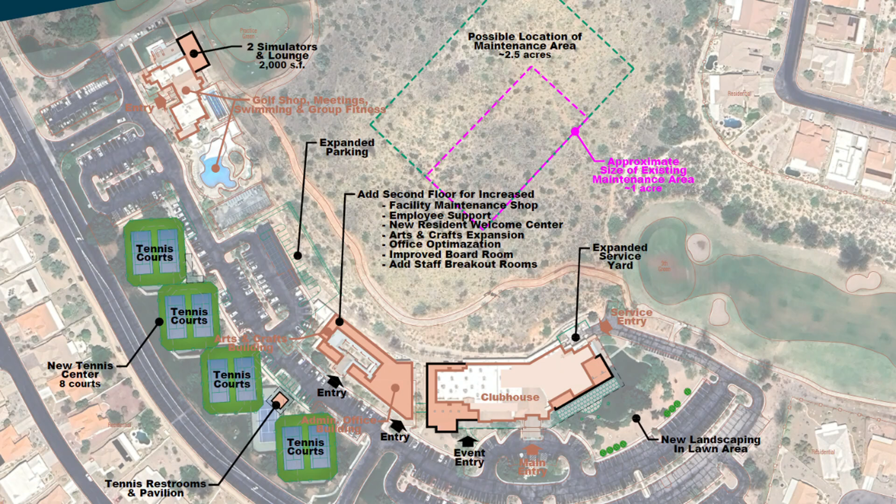You might get into it and say we need this more shaped to the hillside, more of a curve, but at this point we're not getting into that level of planning. We're looking at where we have space around our campus and community to house this kind of facility to serve our maintenance needs.

This would give us the ability to house a complete maintenance facility on this site, serving Mountain View and CAM for the entire community as a central maintenance center.

After looking at that, you'd ask: what will we do with those other maintenance sites we already have? Those could either become satellite facilities or we'd find other uses, and that might affect how big you'd ultimately make this. All of that is still to be determined—we're not ready to decide any of that yet, but this gives us a visual idea of what it could look like.

Let's look at the next slide. On this slide you can see the exact same thing I showed you before, but flattened out more into a plan—we've eliminated the aerial photo and given it a more graphic plan.

Here we're showing some expanded parking into the hillside, because we're taking some parking for the tennis center, and we're rebuilding all of the tennis shelters, platforms, and tennis pavilions—a whole tennis center.

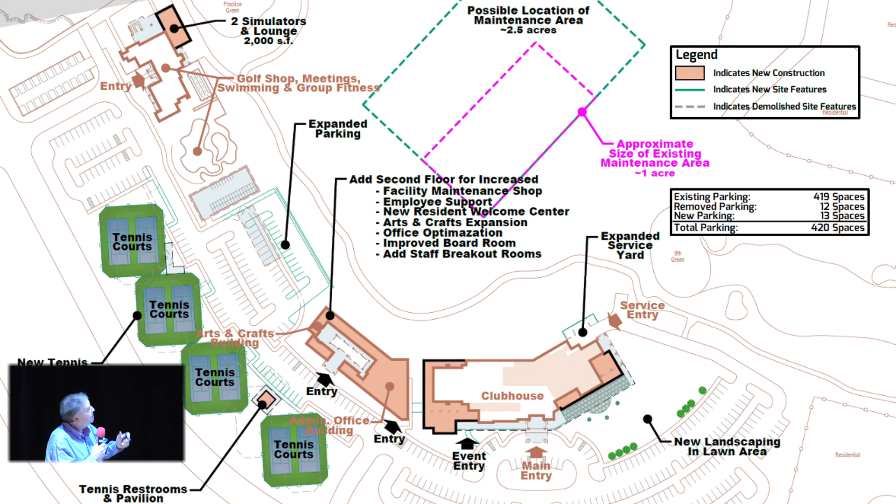Let's go to the next slide. This is a blow-up of the golf building, and as part of that building—we talked about this last time—it doesn't have a lot of traction, but I think it has a place in the plan: some simulators and a lounge as part of the existing building.

The simulators would be under the existing porch roof you have today, so it doesn't anticipate any additional roof on the site to speak of—it just fits under the existing roof and becomes additional enclosed footprint within the building.

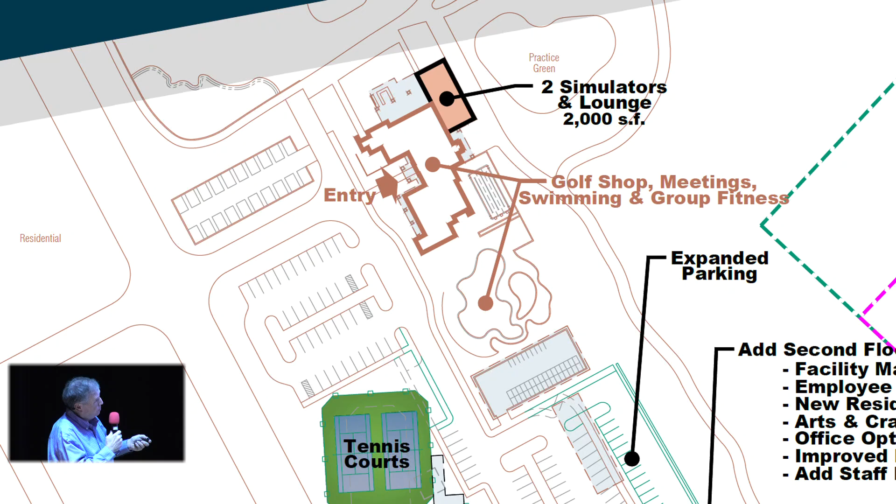Let's go to the next slide. On this one we show the new tennis center, which would include a tennis building and reallocation of parking—you can see the green.

The lines here show new sidewalks and new parking. The dashed lines show where existing facilities are, so you might have a curb there, or an existing tennis court sitting in this area. Basically, we've reallocated all the space where the tennis courts are today to get 4 sets of 2 courts, for a total of 8 courts.

And so you get a whole new tennis center out of the deal. The other thing we're doing here, and I know there was a lot of input back on this, we don't want to have a 2-story facility at the club.

At the same time, I wanted to challenge you back on that a little and say, if you don't have a 2-story space, we're either going to have to find more space around the facility, like up on the hillside for more maintenance facilities, or we're going to have to take parking or something else to get to our goal of basically doubling the size of the arts and crafts expansion and office optimization.

Ultimately, we need a map location for how we would double the size of our existing arts and crafts and admin structure. Dan and I have been talking about this offline, and he points out that potentially some of the clubhouse maintenance or internal building maintenance, which takes up about 2,000 square feet or less in this building, could potentially move into a community maintenance facility if it was close enough.

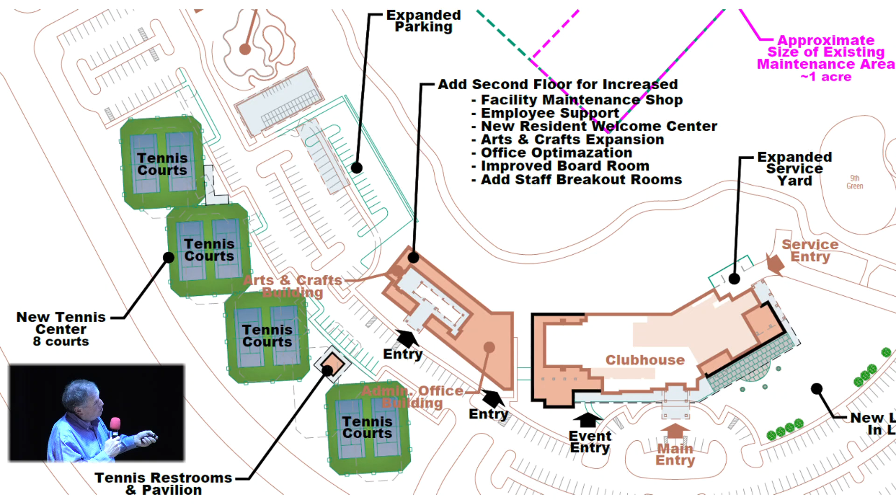My takeaway, and why I'm sort of challenging you back on it, is you can easily see that doubling the size of that is going to take that parking lot. I didn't want to give up that number of spaces necessarily, or we're going to have to do some sort of structured solution into the hillside, which is an opportunity or an option we could do, but you're still going to probably end up going up. Otherwise you're going to be buried in the hill with those facilities.

So here, at least, we could say you could imagine and envision that all of the community and homeowner functions would be on the ground level, and just let the offices go to the upper level and be in an office complex that would sort of wrap around. The exact design and detail of that could change. You could say, okay, we'll have less courtyard and more of something else—all of that is up for grabs in a more detailed design as you get into it.

Our real goal here is this: either we need to adjust our program and say we don't need more arts and crafts room and we don't need more offices and all of these kinds of things, or if we agree with our earlier suggestion that we need to about double the size of that, we either have to find more space on the ground for it, or we can go ahead with a two-story solution like we're showing here.

It makes me think this makes more sense visually on the site. It doesn't have to be huge, and it makes more sense from a centralization standpoint on the site. If it doesn't work out, then we'll bring options back to the committee. As we look at it, whatever you want us to do, we'll take it back and work on it. Let's go to the next slide.

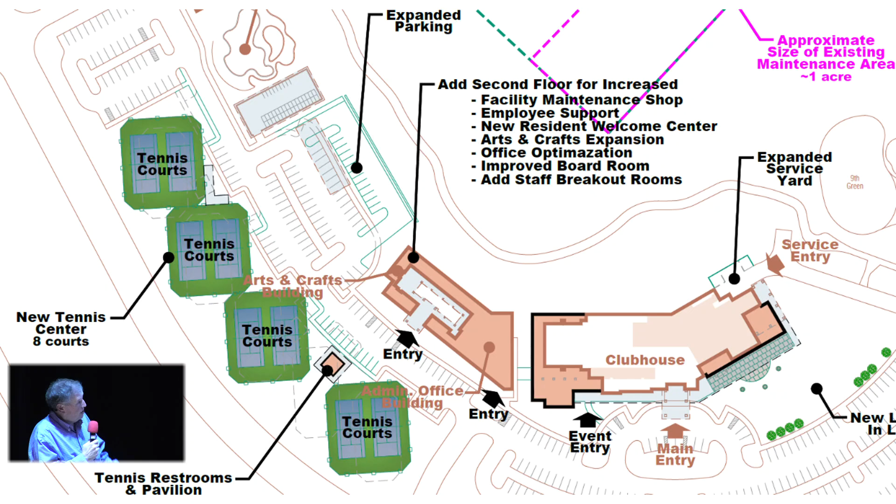We're going to go into the clubhouse here a little bit. On this clubhouse plan, can we move this guy up there in that corner maybe, Booth? So we can, thank you. Obviously this is our arts and crafts building over here on the left-hand side, and then we're having our main entry and our new event entry coming in here.

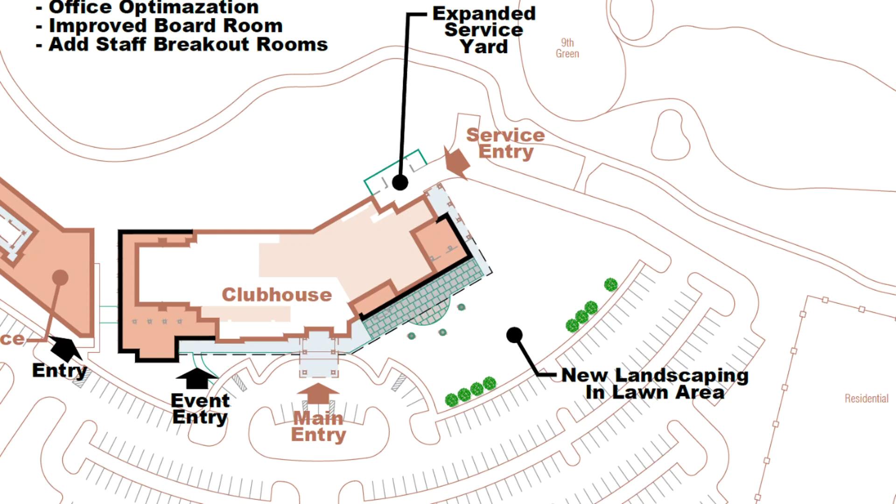I think changes to this plan since you've seen it last time at this site plan scale—we adjusted this area. There was some question whether this covered area and outdoor area was big enough. So we've shown a little more covered area, a similar amount of covered area, some more outside uncovered area, and some fire pits out on the lawn, which is a nice feature you could do. Again, it's sort of graphic at this point.

It's not really, it's meant to tell us that we're doing something there. It'll ultimately get more design.

The other thing I think we did is we're showing a little bit more connectivity, and I'll show you an interior diagram of this, which you can pick up on what we're doing a little bit better.

And the last piece, two other pieces. One is we're showing an expanded service yard, which we didn't really show last time, but we think we should have more room in here to service that space, to service our kitchen and everything, so it's an expansion of the service yard.

And the last piece was, as we were thinking about how this entry would work and how you might come to this front door and get dropped off, you might want to just walk on a covered walkway down to that entry rather than have to either walk on sidewalks around or walk into the building and walk down the hallway. It gives you just a secondary option.

And I think it could give us the opportunity as we start to change this building with new additions and the kind of work that we're talking about, we might want to really change the facade or adjust the facade if we feel like it's necessary, because you could do these new arcade covered walkways that walk all the way around for the outdoor. You could walk in, for example, at this main porte cochere and turn right and come right into an outdoor dining area rather than coming into the house and coming back out of the house, and just sort of gets it all connected.

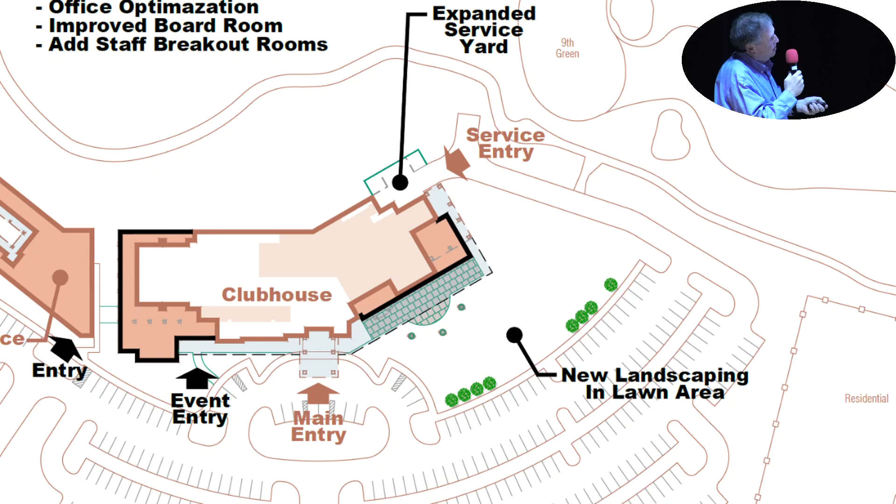There's opportunity for design there and design work that can create a much more unified appearance along the entire facade of the clubhouse. Give us something to work with as we start changing elements around the facade. I think that's all, it's sort of in a master plan. It signals an intention of better connectivity on the outside as well as on the inside.

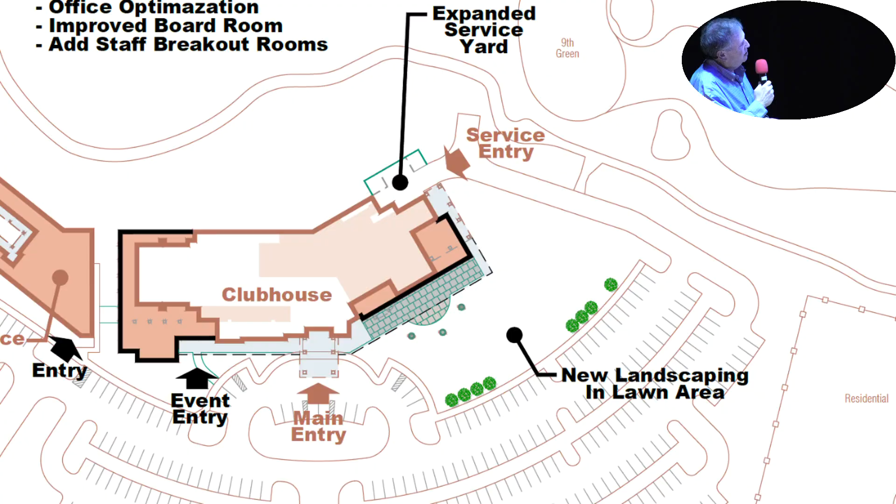So there was some question that sort of came up about, are we big enough, are our restrooms big enough, and those kinds of things. And what we're showing you here now is, largely what we're adjusting is not internal seating counts.

Some increase in the member restrooms, especially on the a la carte side, about 80 square feet more for the restrooms. And then the Sonoran room, which is sort of a private dining room we talked about last time, there was some thought that maybe it could be a little bit bigger. So in the last one we had that about 1,100 or 1,200 square feet, now we're showing about 1,500.

And then we get a new entry foyer, which is our entry into our ballroom space, and some more furniture storage back of house space, which is really inadequate, same thing with kitchen. The biggest adds here are the things that let us service the club better, service our members, our users, our guests better. So better furniture storage, better kitchen space, all of the back of house stuff to let us really operate it, all serving a similar number of seats and places within the facility.

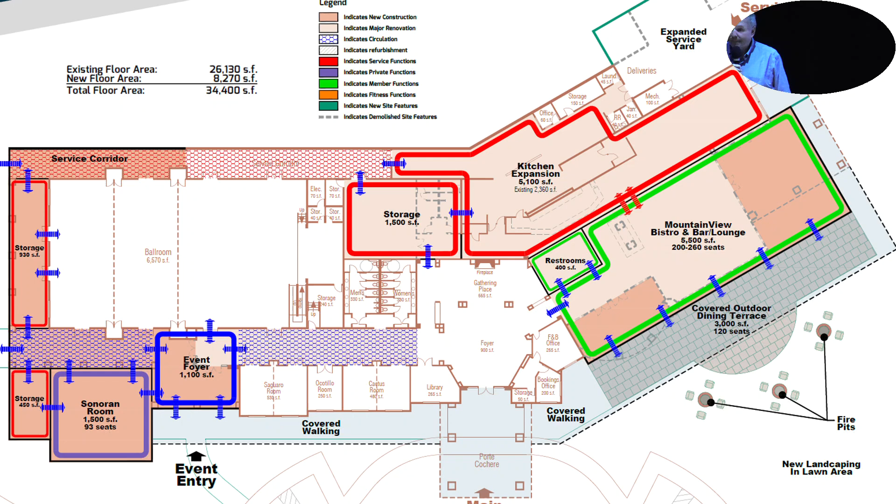Well, anything can be done in phases, and then that gets into the whole discussion of what's a phase and what's an effective and appropriate phase, right? So you could look at this and say this whole right-hand side of the plan could be a phase you could do, and you wouldn't do anything on the left-hand side. But at some point you'd get to where you'd say, well, I just want to do the kitchen - but you probably aren't going to be able to just do the kitchen as a phase because it affects too many other things in a domino way.

You want the phase to be big enough that you're not spending a lot of extra money in mobilization costs. If you do 10 different little phases, you're going to spend twice as much money as you would if you just put them all together, because of all the mobilization costs of starting and stopping. So, everything we're showing you could be done in phases. It's another group's responsibility eventually to figure out what those phases are going to be.

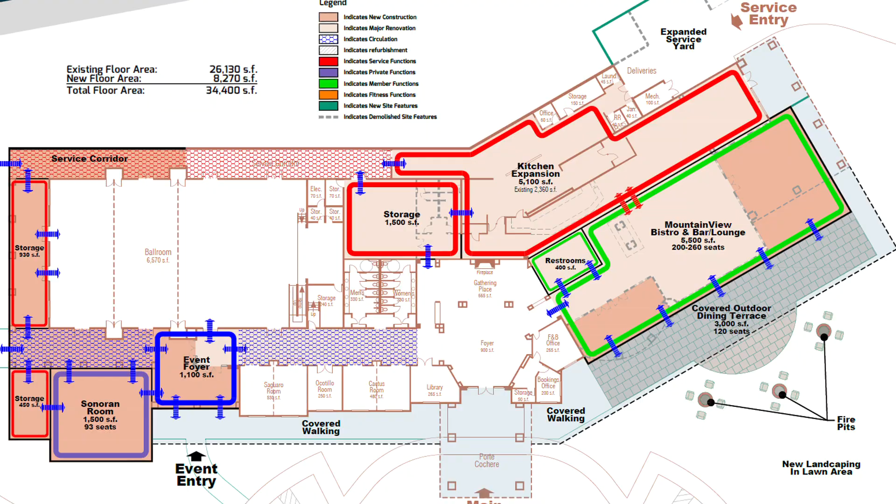If you go back to the existing surface area - sorry, back one slide. Go back one slide. One more? Two, one more, yeah. So our new cornhole is going to be in that space where you put lawn games, and then we have this empty space right now.

Just looking at the footprint as it exists, talking to a lot of people, when you talked about having a gathering place for the theater, that empty space could be a gathering space for all of this. It can be attached to the patio for the pool, but it can be a juice bar, a coffee bar, a theater - where the tree is, the empty space right there. This space here. Yes, that area.

In talking to people, if they're out walking, playing tennis, at cornhole, at the pool, at the gym, a gathering place in that spot without having to do a mega thing is something that people have talked about wanting. Whether it's a coffee bar, a juice bar, later on, maybe it even has some game entertainment or something with it.

But why aren't we just thinking about using that space instead of just taking things apart in mega style that we can't afford? Well, I wasn't so concerned about affordability yet, because affordability is all down to phases and what you want to do and when you want to do it. But I think it's easy to think about.

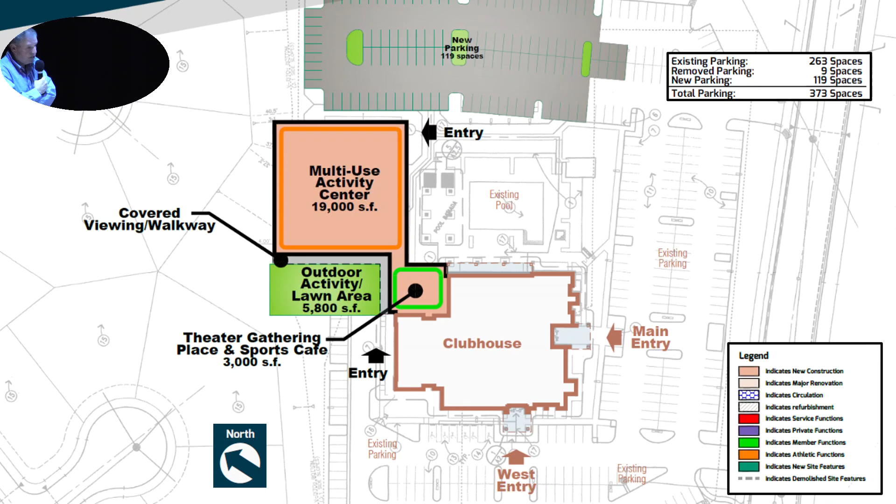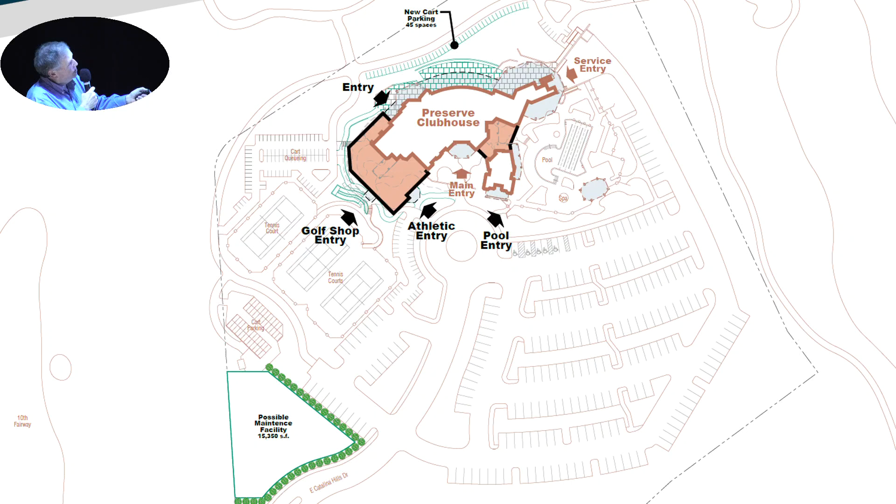As we come around this facility, we have a walk coming up to the top, and we'll have a secondary entry here, so after golf you might come up this way and enter this way as well. So that covers the additions and things we're thinking about on this.

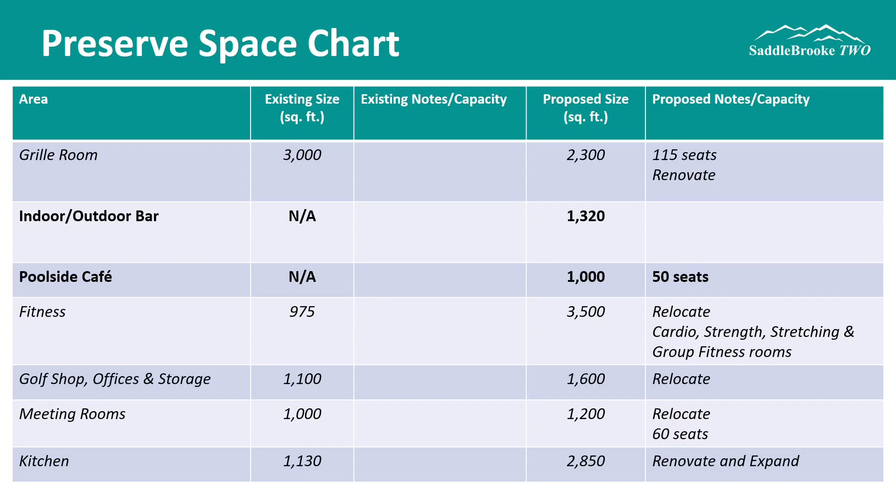The indoor-outdoor bar becomes a new space within this plan. The poolside cafe doesn't exist at all today, and we're going to create a new poolside cafe at this operation, again providing those central gathering spaces around activities at our various facilities. Our fitness space is about 900 or 1,000 square feet today, and we're going to about 3,500 square feet.

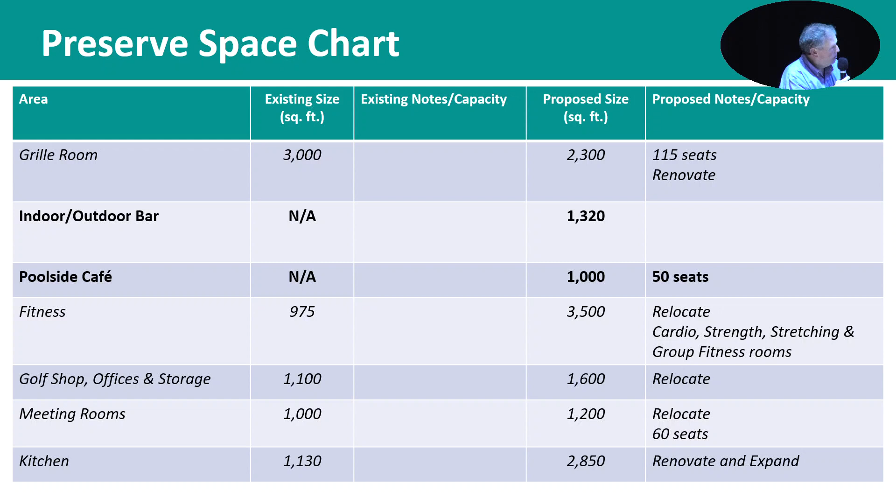The golf shop and storage is a little undersized today, and we're showing a bit more room, mainly for back of house within that golf shop—I don't think the sales floor needs to be a lot bigger. The meeting rooms are largely about 200 square feet more. And in the kitchen, just as at our other facilities, it's significantly undersized, so we're more than doubling its size to serve all of this activity we're thinking we could create over here.

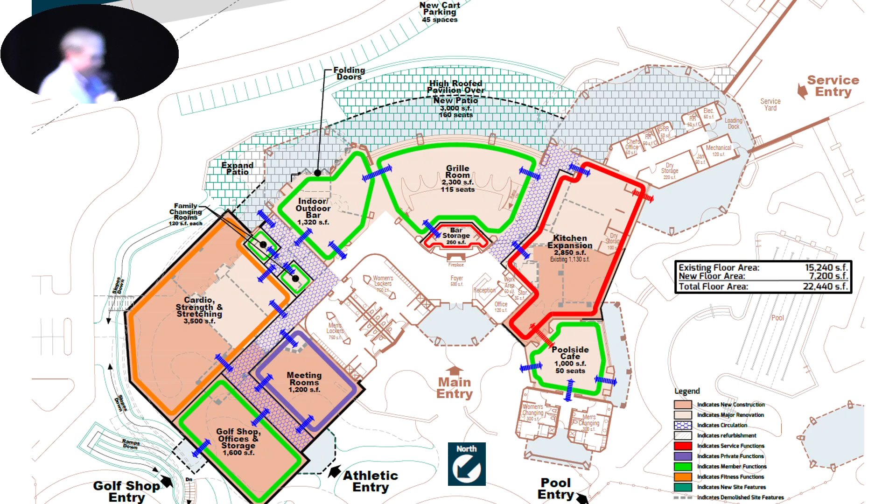Sure. So Kevin, you want to jump in on this too? I don't want to leave you out of the entire meeting, but I'll start though.

Where would I start? Well, that's actually a bit of a scientific process. So you show, some of it is right here in this group. We need to prioritize amongst ourselves. We have priorities that are given to us in the survey that we've already taken amongst the entire ownership. So we need to look at that survey. We need to soul search here amongst ourselves. And then based on that, we start looking at what's a higher priority and what's a lower priority.

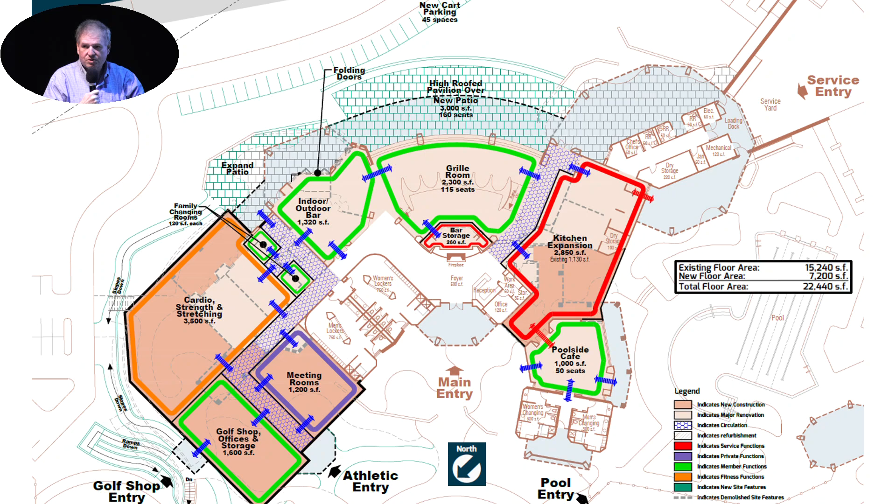Some of the other factors that go into that decision, in my mind, are extreme weaknesses, things that are extremely weak, like our maintenance facilities or our back-of-the-house facilities, which are very weak and underserve us and underserve our staff. And then I also think you would look at facilities you'd want to tie together, so you're always trying to find things that go together in such a way that they support themselves in the phase.

We have something we think we can get a lot of support for, some facility. I'm not sure what that would be. Maybe some sort of facility like the Mountain View Dining Facility. Updating that would be something we could get a lot of support for, having a much better dining facility and a kitchen that serves better. And then you try to tie that to some other need, so you're packaging two or three things together, something people really want with something that's like the sugar around the medicine pill. You've got to do this thing, so you give them something they want, and at the same time give them something that needs to happen. So there's always that political aspect of trying to think about how to put it all together.

How you do it is just like how do you eat an elephant? You do it one bite at a time. So communities like yours all over the country have to systematically approach making these improvements.

You find you're not the only community that's turned over and found out the developer somehow made it work just through spending a lot of money. And now you don't want to spend that much money to make it work anymore. You want it to be more efficient, and you want it to serve you better. And you're the owners now, so you have to think about it differently — the developer probably said that golf course equipment's not too important to me because I'll just lease it and turn it back in. He didn't have the same time horizon as you owners have when you own that golf maintenance facility and own that equipment. Now you have to think about taking care of it more because you want it to last longer so you don't have to pay so much for it.

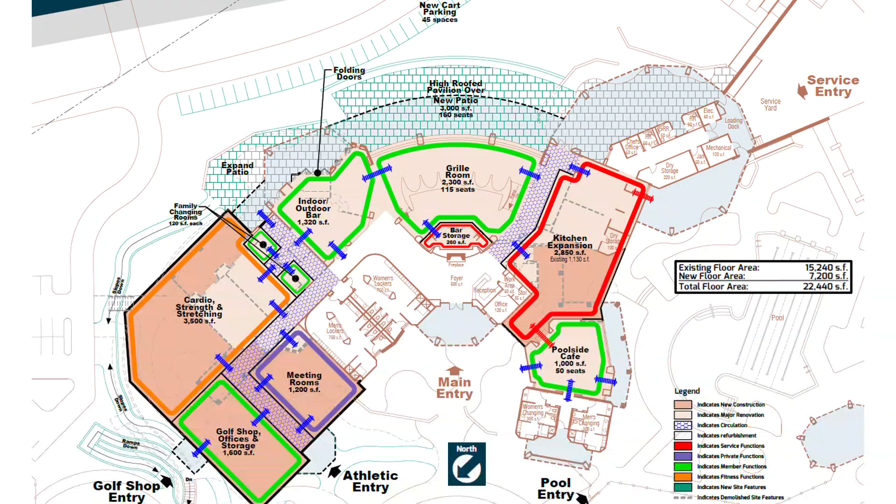Here we go. They're all great. Let's do the next slide or two.

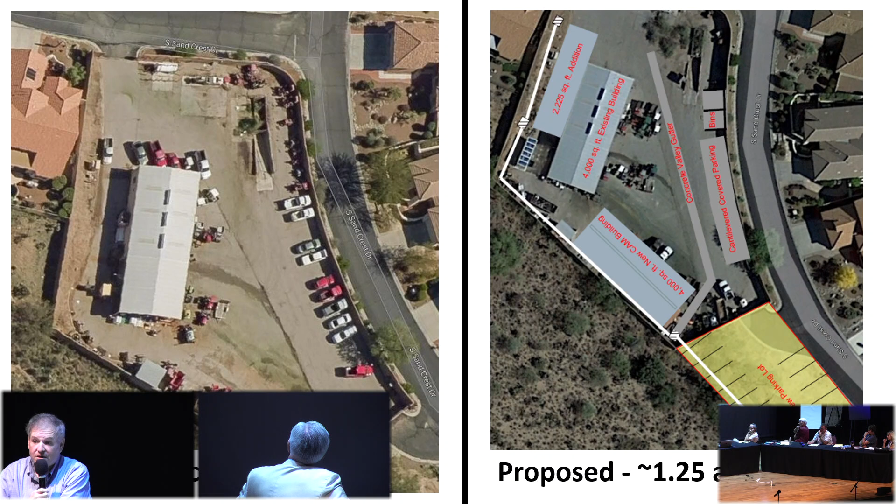I do know something about the land to the right—we don't own it. It's owned by First American Title Corp. According to the county, that land to the right, if you go back to where the yellow is, we don't own that. And then everything around it is state land, all outside of this line here.

So that improvement apparently might involve purchase. Yeah, it would require purchase, I think—it's a political issue. This idea has been provided to me by someone near and dear to me: why don't we use our political leverage here and see if we can get a couple acres pushing to the south to offset what we're doing from these homeowners. Obviously that would be a long, arduous task—that's state land, and it would involve the state's willingness to do that for us.

This is much like when you're in a confined community surrounded by state land and other people's property—this is not an easy solution where you just have one fix on the master plan and that solves it all. That solution doesn't seem to exactly exist here. So there are some solutions that could be effective, some relatively short-term with additions and other things that could improve the community.

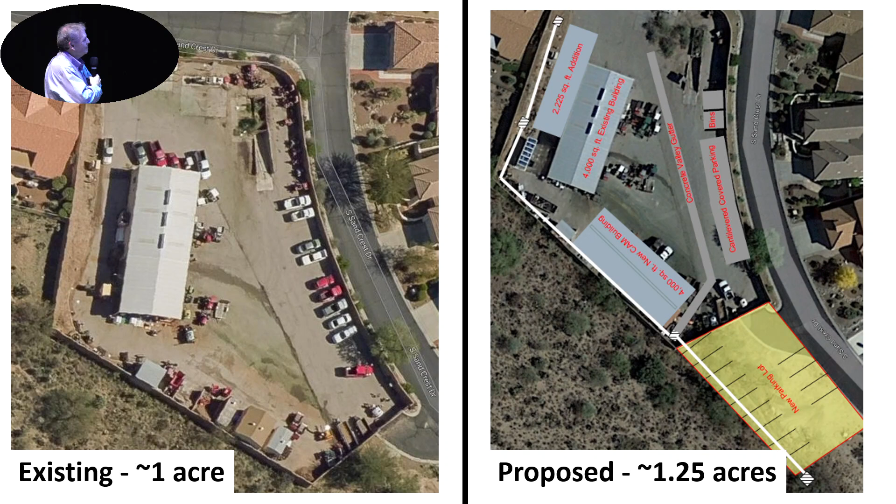Kevin was saying safety issues. Well, so if you were to improve the existing site, how much would you expend? And if you were to just start over on a new site, safety, political, and all of that - again, you're investing in a site that probably isn't desirable, and it's arduous to do anything around it because somebody else owns part, the state owns part.

So if you were to go to the hillside, what would that cost? We'll have some information on that, we'll think about it for our next meeting when we talk about priorities. Obviously, fixing up this site in a moderate way is going to cost a lot less than redeveloping a whole new site, no matter where you put it. But a hillside site is going to be incredibly expensive to deal with because of all the land work and that kind of stuff. But that doesn't mean it's not the right thing.

You can put it on the map and address it over a period of time. And eventually you'd have something that everybody would be really proud of, that serves the community well for the long term. Unlike some of the other decisions we're talking about here, getting these right - they're 50-year decisions. If you fix a maintenance building, you're not going to come back and do much else to it for another 50 years.

I know this because in my career I've done some of these, and I've seen the kind of time frame that these buildings, once they're there, they're there for the long term, so you want to do it right if you can. These aren't 10-year fixes - well, they could be short-term fixes that get you over the hump, they'll still cost a lot of money, but it would be better than what you have. So it's something I don't want to belabor - there's a lot of unknowns in this whole thing.

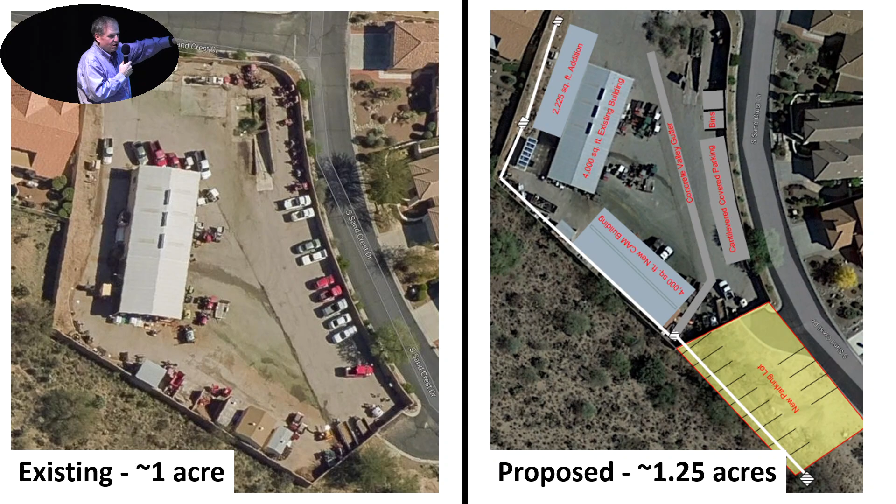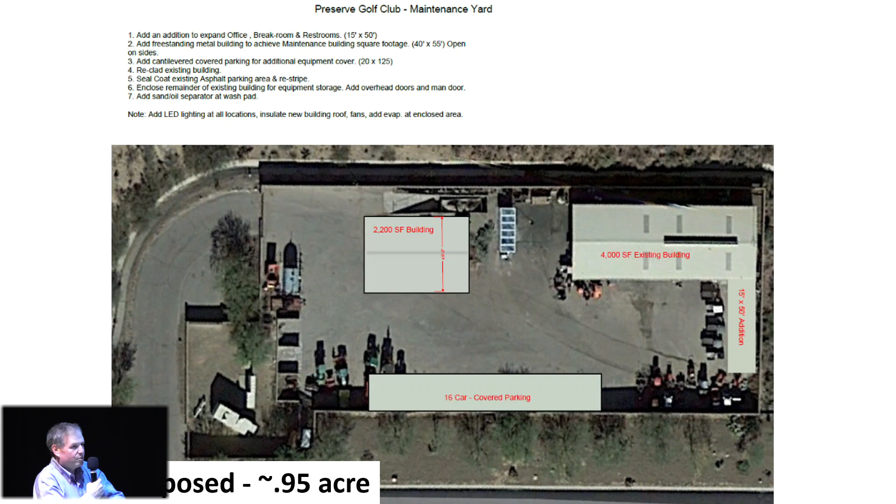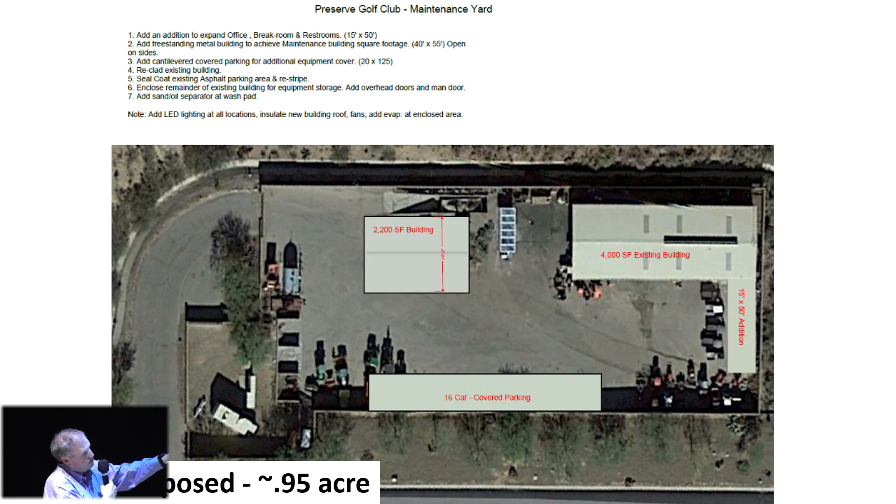These are just... what they're talking about here is adding a building, or really not even a building, just a cover. Like a cover for the pool, there's a cover here, 2,200 square feet, some covered parking over here. I think there's an addition to the building there, which would be new, and then maybe some renovation to the existing building. So there are things you could do to improve the existing facility, and this is sort of where the executive committee got to with how we could improve it. I'd say these are not long-term solutions, but they would definitely make things better.

Go to the next slide. These are just blow-ups of that. Really, we can sort of go back... thank you. Those are just blow-ups of how this is too detailed for us really to worry about where the offices are and all that kind of stuff.

Any questions about where we are with that, though? Or Kevin, anything you wanted to say?

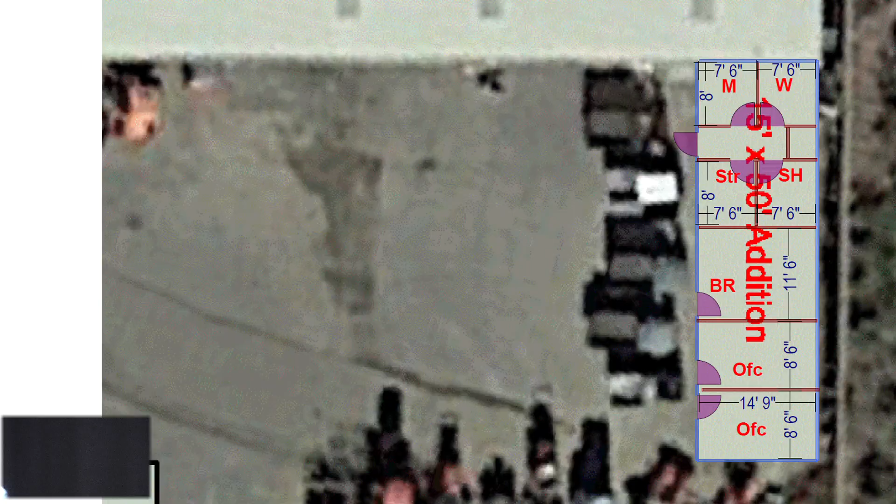So, if you go back to the one at the Preserve, the Maintenance Facility, what's a dollar estimate on that? Don't know yet. Don't know yet. Haven't done it. I'll do it for the next meeting, before the next meeting.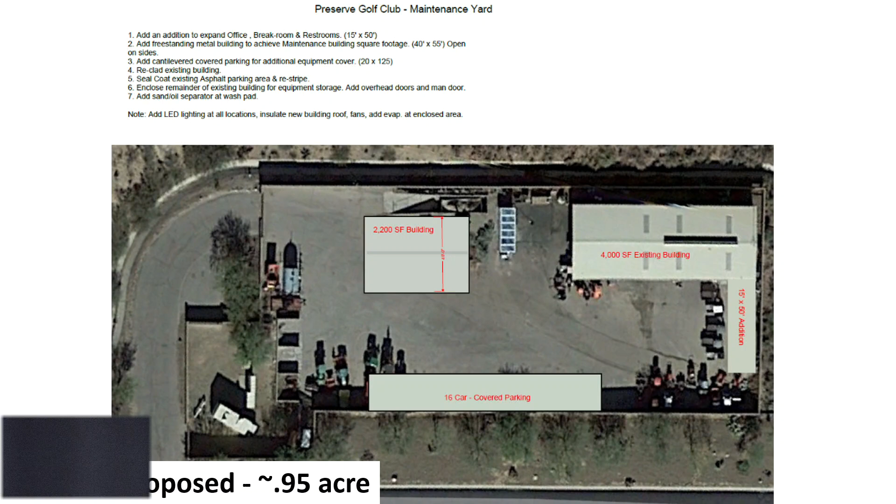In terms of... I come from public schools, people's residents' money, but big-time money. Right. And when we did budgets, we just said, this is what we can afford. What can you do? That is a whole different way than saying, open up the draft plan, design it, and then tell us the bill, okay? So I'd like your expertise on this, there's two ways to do this. One is an open checkbook, which probably won't fly. No, and one is an internal discussion about, here's the budget, tell us what you can do.

So, there's actually a third way, or maybe different from what you're talking about: first you get all of this stuff designed in a plan. You lay it all out. Once you have it all laid out, then you say, okay, what are those phases going to be? And those phases are based on... there's really a three-legged stool before we go and talk to the whole community together and have a cogent presentation. We have to have all three legs determined. That is, what do we want to do, which is plans and renderings and all that kind of stuff that show what we want to do.

The second is, how much does that cost? And then the third leg is, how much does it cost me? How are we going to fund it? And until you have that funding solution, you don't have a plan. You just don't. And we don't have a funding solution, and we don't have a cost yet. And you can't get to funding until you have a plan. Once you have a plan, you can get to how much it costs. Once you have how much it costs, you can get to a funding solution based on how many things you put together into a plan. Does that make sense, what I'm saying?